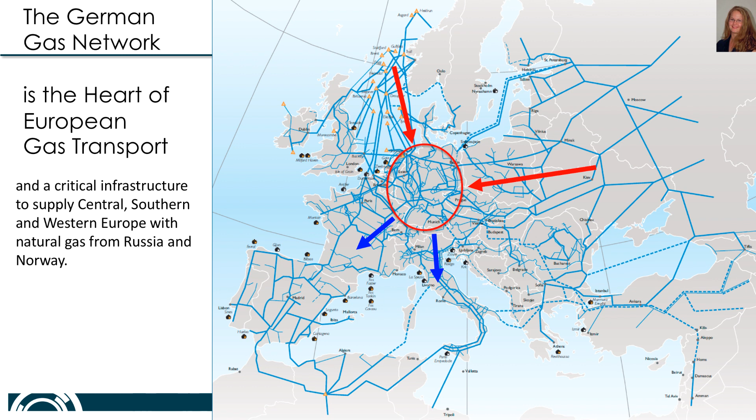The German gas transport system is located in the center of Europe. The majority of the gas comes from Russia and Norway and needs to be transported through the German network. Germany is the European gas hub. Only half of the gas entering Germany is actually consumed here. The other half is transshipped to secure the supply of Western and Southern Europe.

The liberalization of the European gas market in 2009 posed novel and difficult problems to transmission system operators. From the trader's point of view, the gas network is just a point, the virtual trading point, where you can inject or extract gas from. Limits are given by capacity products, either the orders of firm capacity, which means guaranteed to be delivered, or flexible, which means the order will be processed best effort. The only other limitation is that traders need to make sure inflow and outflow are balanced over the full day.

From the transmission system operator's point of view, the network is a complex network. They have to ensure that all transport requirements of gas traders and consumers are met, even if this means gas injected in the north and immediately consumed in the south. Thereby, a transport market of about $2 billion enables a gas trading market of more than $54 billion.

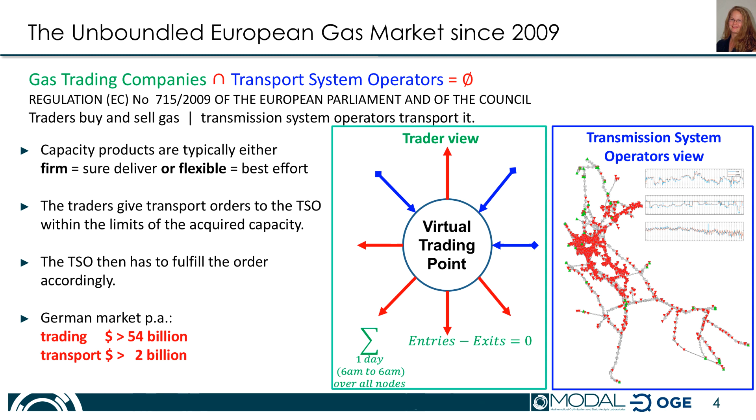The biggest German transmission system operator for gas is Open Grid Europe, that controls a network of 12,000 kilometers. This is similar to the size of the German Autobahn. To control the system, dispatchers operate about 100 compressor units with more than 3,000 valves. Keep in mind that this is a network built during the last 100 years and the oldest still operational part was built in 1916. There's no computer-readable description and it is not stuffed with sensors. This is solid engineering with 1,000 tons of steel.

Currently, the dispatching center is run based on measured data, which is only available in hindsight, and the experience of the individual dispatchers. A major challenge is the security of the gas supply. With the help of a high-end decision support system, OGE wants to meet these challenges and ensure safe, efficient and cost-effective gas transport. Because there's no comprehensive solution available on the market, OGE started the project Optimized Execution of Dispatching.

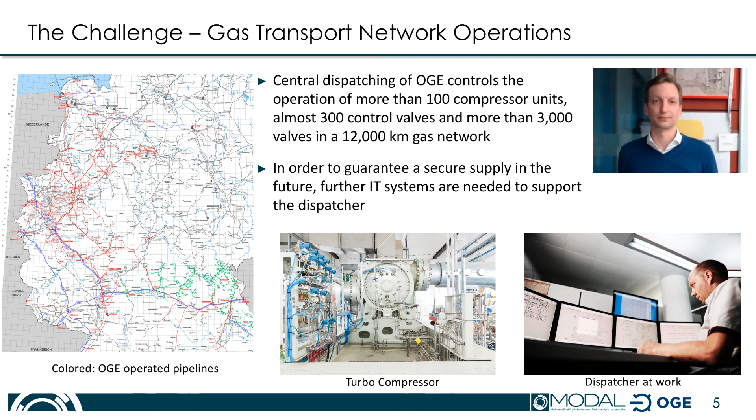The result of this project contributes to several levels of the OGE strategy. It makes an enormously important contribution to the sustainability of the company, especially since there's no comparable product on the market that solves our challenges. With the help of prescriptive analytics methods, it is possible for us to face the challenges of the future with composure. For example, past experiences cannot be transferred to the safe transport of hydrogen. Employees cannot scale increasing complexity and scope at will.

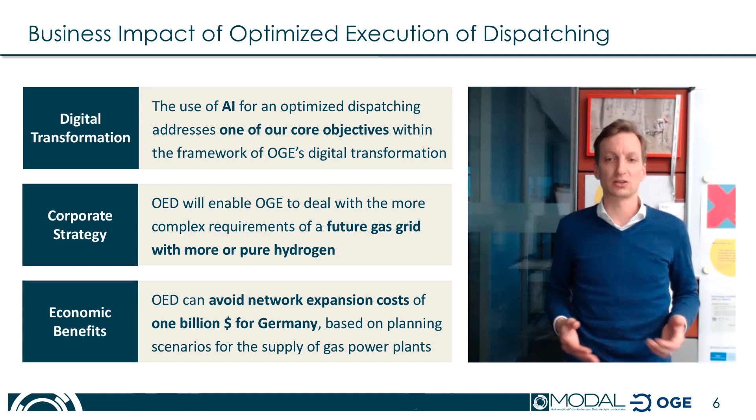Therefore, it is essential for OGE to have a decision support system in place to adapt to upcoming changes, such as market consolidation and the European energy transition. OGE has invested more than $20 million in the development of the system over the past 5 years, and OGE has committed to continue the development cooperation for another 5 years. Savings of $1 billion can be achieved only for Germany due to the better network control and avoiding network expansion. This is a great economic benefit.

Here are the main deliverables we have in the project. First, we needed a high-precision gas flow prediction. The system we implemented is 34% more accurate than the solution OGE had before. It is in operation now since 2018 and continuously improved.

When Germany is going all renewable, there may come a day where the sun doesn't shine and the wind doesn't blow. To ensure the security of supply, several gas-powered power stations are declared system relevant, sitting on standby. If needed, these can jump into operation in less than 1 hour to provide gigawatts of power. But at the same time, they will instantly start drawing large amounts of gas out of the system.

As you have seen, the traders only have to balance their accounts on a daily basis. Now imagine the situation that the power station draws gas in the morning, while the supplied gas is only fed into the network at a distant entry in the evening. Such a situation can endanger the security of supply.

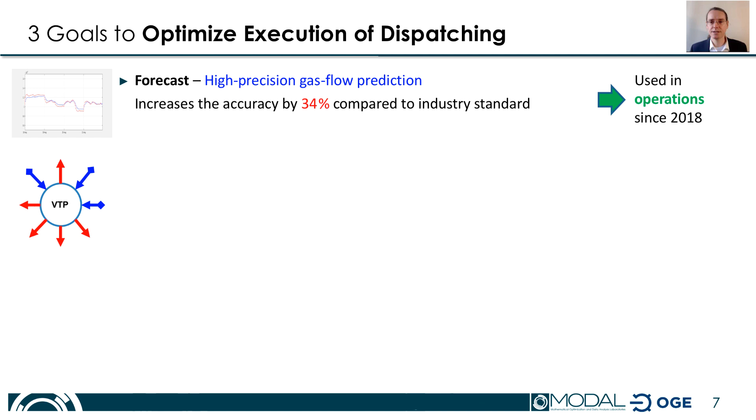One solution would be to build new pipelines. And indeed, the governmental network extension plan asks OGE to spend $690 million for this, as 1 kilometer of pipeline costs roughly 1.5 million. To not have to bury this amount of money into the ground, OGE developed a new product called Firm Dynamically Allocable Capacity, FDAC.

Basically the same as a previous firm capacity product, but with one catch. Now if OGE sees difficulties looming, it can restrict the power station to get their gas from a few previously designated safe high supply entries. But to make this work, a system was needed that continuously monitors and analyzes the situation in the network and detects possible trouble several hours ahead. FDAC is based on our improved forecast system and also in operation since 2018.

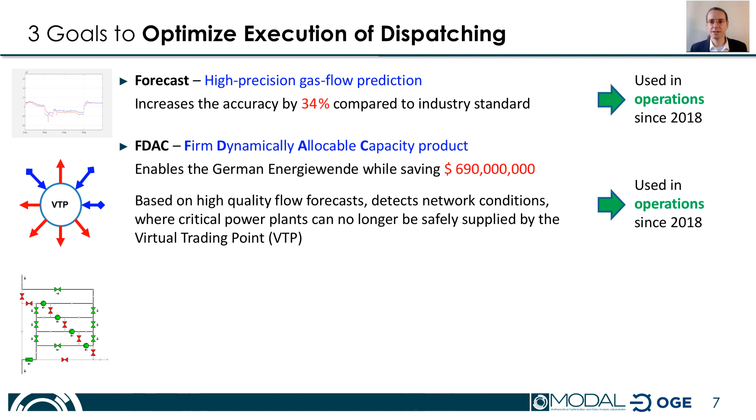Now the final goal is to build kind of a navigation and driver assist system for the dispatching. We call it KOMPASS. Every 15 minutes it analyzes the situation, computes optimized control decisions and gives recommendations to the dispatchers. Forward-looking command and control optimize solutions that can cope with future demands as the incorporation of hydrogen and ammonia.

This system is now deployed and has been integrated into the OGE IT infrastructure. We are currently in a stabilization phase where we continuously improve performance and analyze and check all the data delivered and the recommendations that are computed.

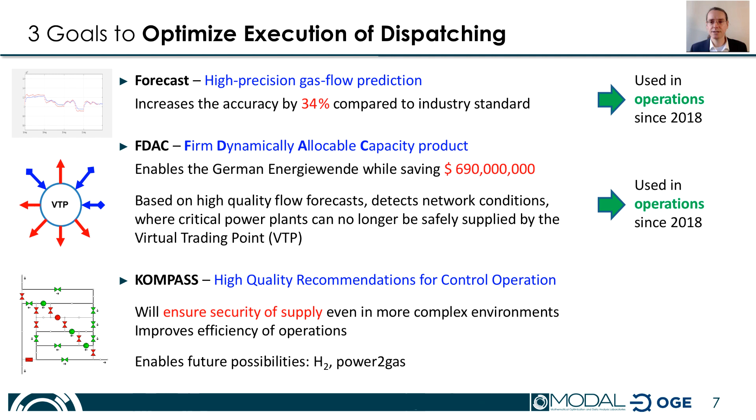At an early stage, the Modal Power Plant product tool enables OGE to recognize when the supply of a gas-fired power plant can no longer be reliably guaranteed from all points of the network and must be made from the specified entry point. With a secure supply of gas-fired power plants, we are making a significant contribution to the success of the energy system transformation.

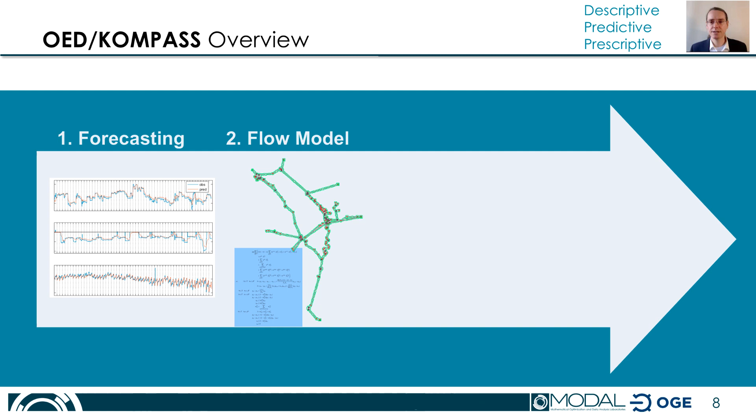This picture shows our overall solution approach for the KOMPASS system. First, the forecasting runs. We'll discuss the details how this works later on. The system has two stages. The so-called network flow optimization uses an aggregated network and a comparatively simple station model. It decides with a global view on how to overall route the flow and where to compress the gas.

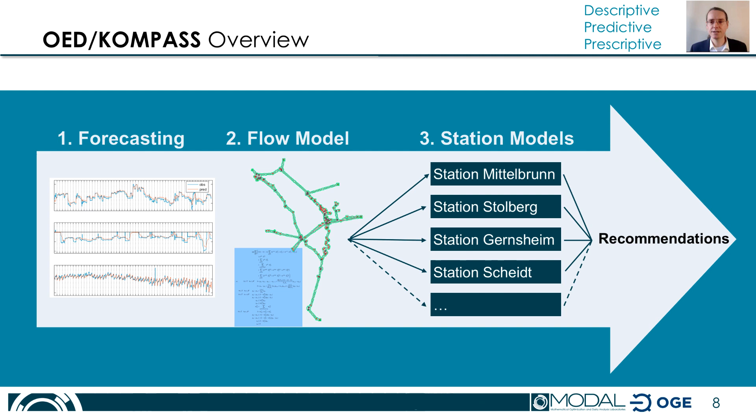Afterwards, at each station, we use a detailed model to find the precise decisions and operation modes to realize the flows computed by the flow optimization. Each station is rather special and specific and has to be modeled individually. Some are easy and simple, and others are nightmares of complexity. At the end, the computed actions are combined and recommendations are given to the dispatchers.

Obviously, our system has to run 24/7 as gas is transported all the time. The situation continuously changes, so we compute an update of the recommendations every 15 minutes. First, we have to collect all the new data coming in. Currently, there are 3 external systems, which are connected by 9 different interfaces to our system. Based on this, an initial state of the system is constructed.

Since there are different time delays with the data transmissions from the sensors, the view of the system we get is hardly ever consistent. For example, you close a valve, but the flow sensor is not yet updated when we start the run and still reports a substantial flow. So the first challenge is to devise a consistent and likely correct state of the system.

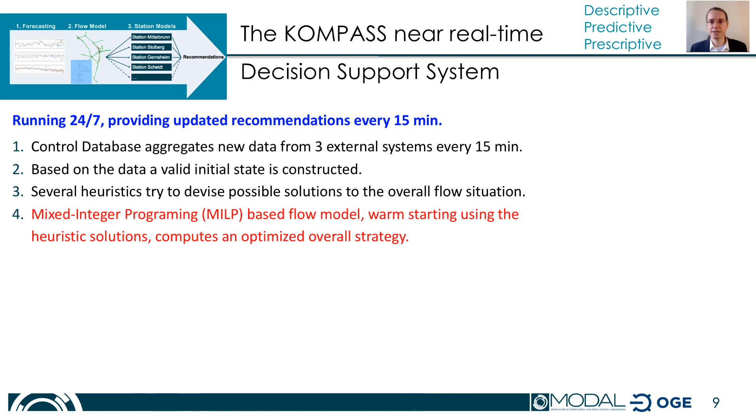Then we run several quick heuristics trying to find any feasible solution fast. With whatever we have now, we start our main mixed integer linear programming based flow model. Actually, this is of course a nonlinear problem, but we have linearized the model to speed it up. This way we compute an optimized overall decision on the flows for several time steps in the future.

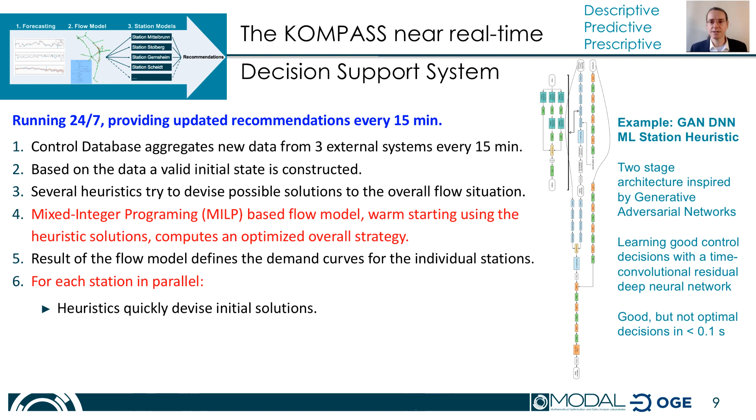These results then define the demand curves for the individual compressor stations. And now we compute the stations in parallel. Again, we try heuristics first. For example, we are currently experimenting with a deep neural network heuristic based on generative adversarial network architecture. Results so far are promising, and we believe this will allow us to scale up our approach better. Basically, the neural network tries to learn to guess the correct solutions of the integer program.

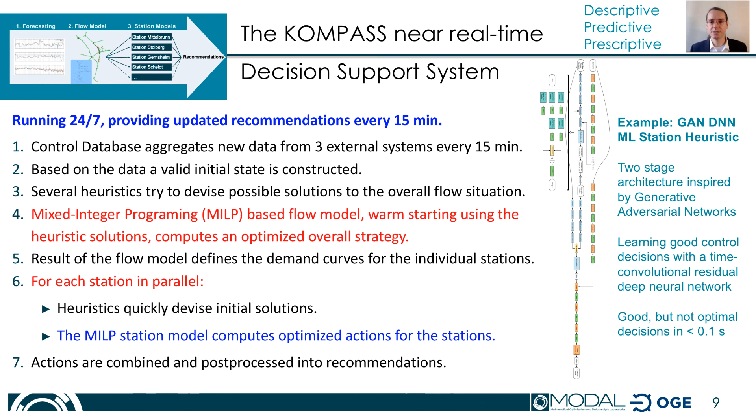Then we run the precise mixed integer optimization model for each station, taking all details into account as good as we can. Finally, the optimized actions computed for each station are combined, smoothed and post-processed into recommendations to the dispatchers. Here you see some of the underlying mathematical optimization model we built. Please keep in mind we are not just computing one setting of control decisions, but a timed sequence that keeps

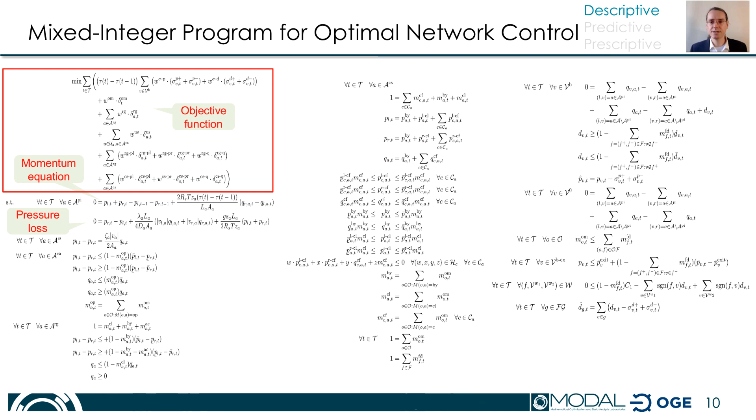the network operating efficiently. Here you can see the elements of the model: the objective function, the momentum equation, the pipeline pressure loss, here are the resistor constraints, modeling of the valves and regulators. This is part of the model of the compressor station, and here you see the station section. This is a general flow model with the flow conservation and demands, the exit pressure constraints, and the flow direction. We assume several simplifications such as isothermality and a constant friction factor in the pipes to derive this linear formulation.

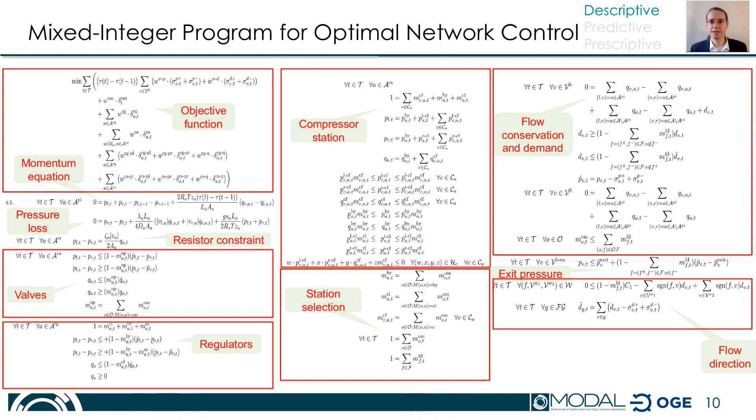Unfortunately, the full model is computationally intractable, even for small networks, and thus we came up with the two-stage approach I showed you. Each part is dealing with one of the complexity sources, the overall transient gas flow on the one hand, and the detailed combinatorics at the junctions, that is the compressor stations, on the other. Let me show you a few more details.

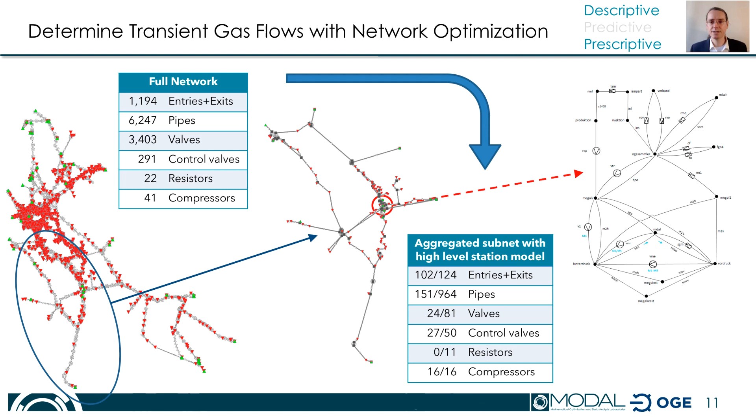Solving the transient flow problem for this network, we derive flow directions and coarse control decisions at the stations, which then have to be detailed and validated in the subsequent step. Let's look at one of the most complex stations, Gernsheim. All these buildings you see on the left picture are just one compressor station. On the right you see a schematic view. You see the outgoing arcs, and at each arc is a command profile over time computed by the flow model, like the one shown here.

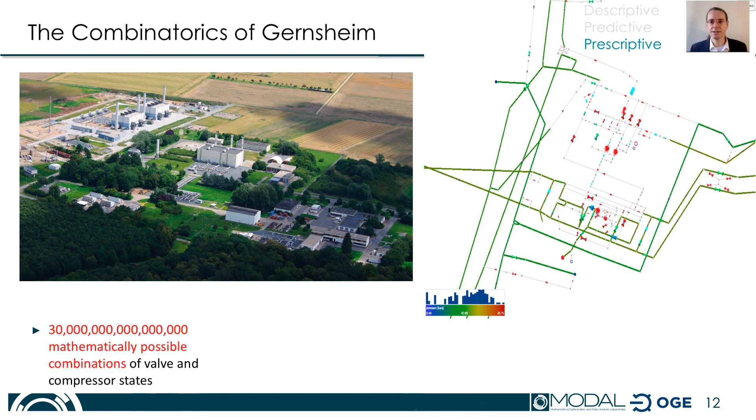As mentioned before, taking into account each possible state for each actively controllable element of the station, we end up with 30 quadrillion possible combinations. From these, there are about 200,000 technically valid combinations, so-called operation modes, based on the knowledge of the dispatchers. Analyzing historical data, we were able to reduce this number to 1,285 necessary operation modes, covering nearly all technically feasible options. These were just the discrete decisions.

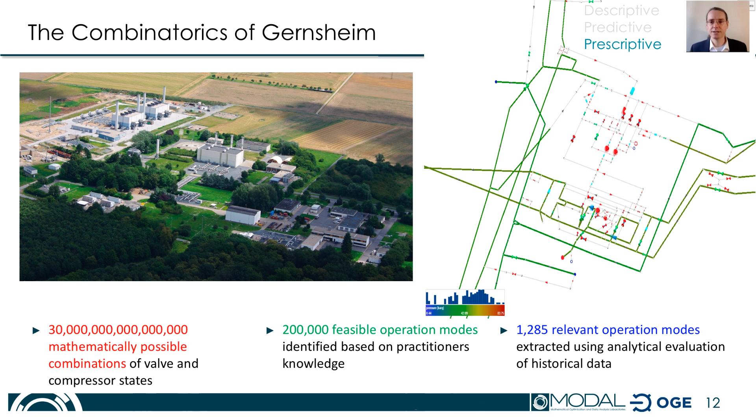Once an operation mode is chosen, there are several connected continuous values that have to be determined accordingly. And remember, we have 40 of these stations, though most are a bit easier than Gernsheim. Here you can see a demonstration showing the result of the computations for a station. On the left diagram, the colors show the pressure level of the pipes, the amount of flow is indicated by the thickness of the lines, and the arrows show the direction.

What you can see here is a reverse of the flow over time in a station. On the right, you see the current operating point within a simplified characteristic diagram for two of the compressor machines. As with all engines, there is a feasible operating range. Here it is defined by input pressure, input flow, and desired output pressure. Then, depending on the drive of the compressor, there is a certain optimal operation range where the machine runs most efficiently. I won't go into details, the whole thing is rather involved.

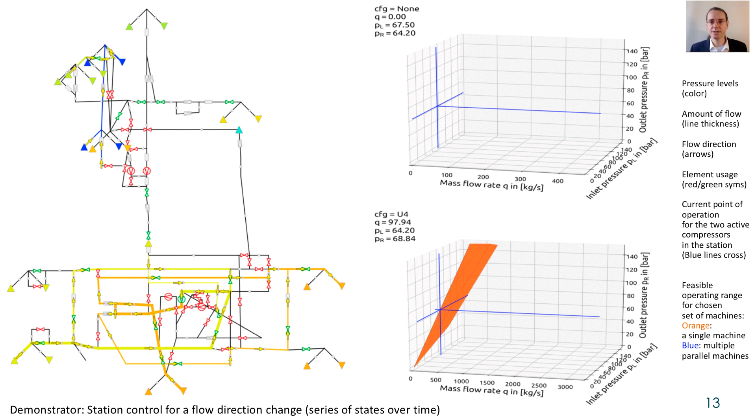The performance of the compressor even depends on the outside air temperature. You can make this arbitrarily complex. We spend a lot of effort to come up with a simplification that can be computed reasonably fast and lets us stay within the feasible bounds and favors the optimal operating point. With our first version, we ran extensive tests.

To feed the Navi with future gas demand and supply for up to 24 hours, those being the boundary conditions of the prescriptive problem, we have to forecast the flow at more than 1,000 different entries and exits. As they represent various types of transport customers, ranging from power plants, border points to other countries to industrial end users, their statistical characteristics differ a lot. So obviously, one forecast method will not do the deal. And since the Navi needs online results, we need a computationally very efficient method.